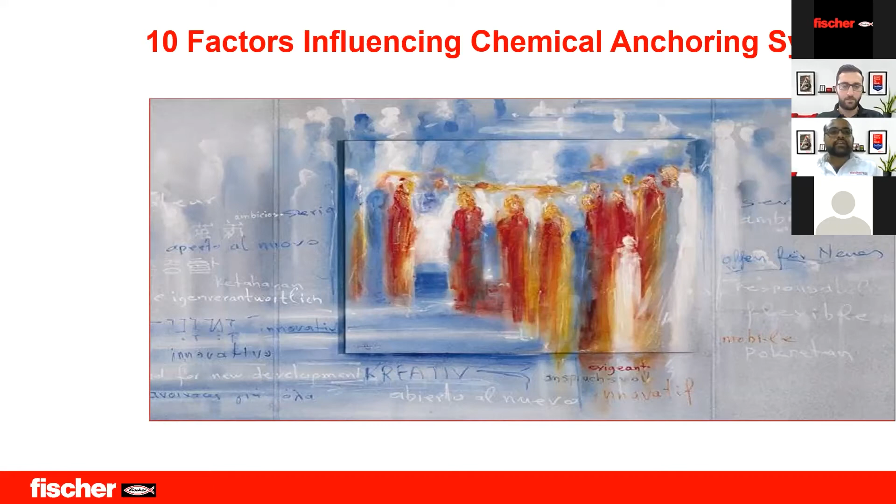The topic, as discussed, will be 10 factors influencing chemical anchoring systems. Today's speakers: myself, Mr. Dinesh Ajay Kumar, Senior Field Engineer for UAE, and my colleague, Mr. Omar Al Jazari, Senior Field Engineer for Saudi Arabia.

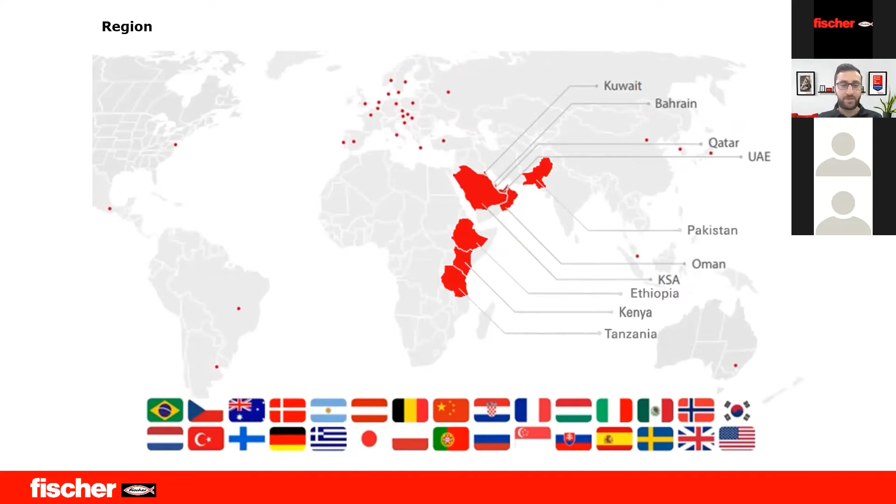Before getting into the detail, let me ask you a simple question: why do you think that the chemical anchor has such importance and influence? Could I have some opinions from you guys? You can put your replies in the chat box.

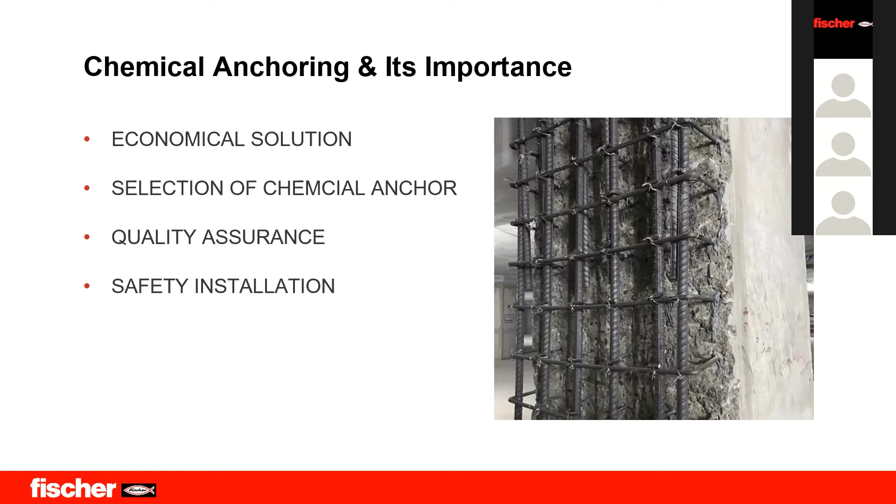As said, it's very simple: we always require an economical solution, so first of all, it's like an economical solution. At the same time, the selection of a chemical anchor should be appropriate, because there are different base materials available right now in the market, so the chemical anchor should suit the right base material. Then quality assurance, which is the most important thing in the Middle East market, because the quality should be assured that it has the capacity to take the load, or it can be used on the surfaces we are providing. At the same time, safe installation. All these points will be taken care of once we cover the 10 factors of influence. And last but not least, the valid approvals.

Here I start with my topic where we will be discussing 10 factors, first 5 by myself and the rest 5 by my colleague, Mr. Omar: different system, bond strength, curing and gelling time, installation steps and accessories, and drill hole condition.

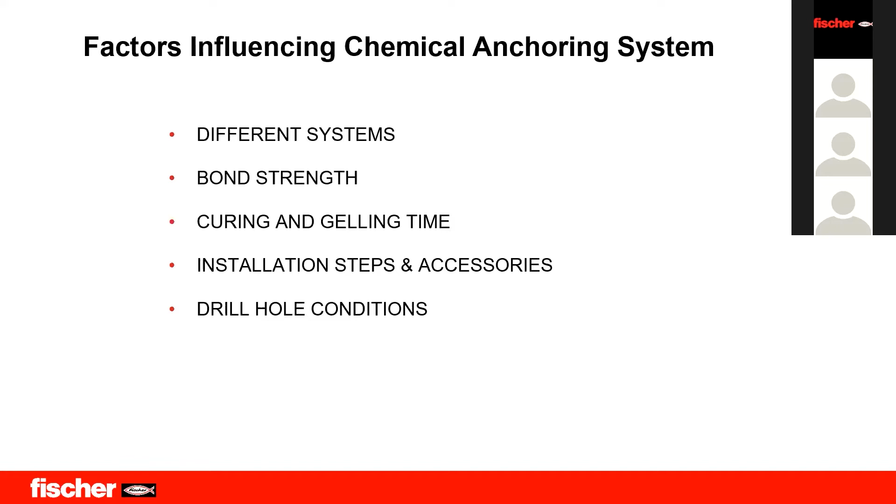So let's start with the different systems. As you are all aware, the chemical can be packed in different types. Some of the packing types are sausage or cartridge type, solid cartridge, bucket or can system, or glass capsules or foil capsules. So how does it differ? What is the point of having different types of packaging? Yes, in chemical, it plays a vital role.

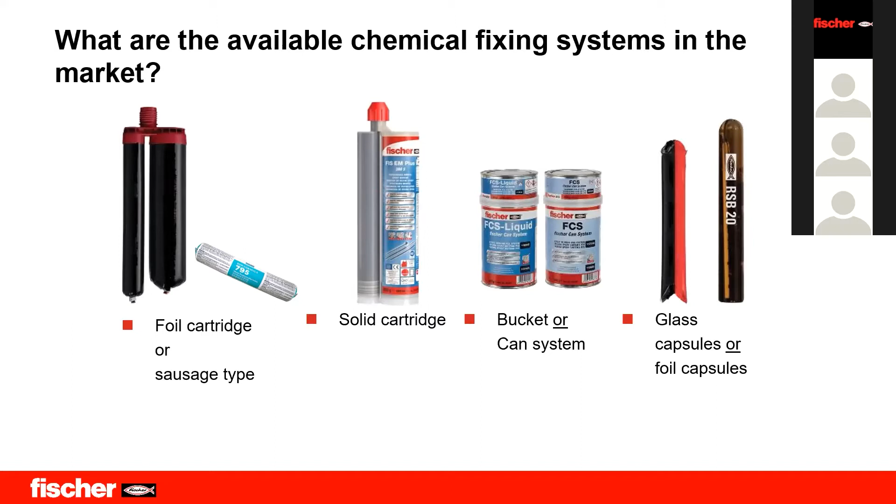Coming to the next slide, it is well explained how it can differ. First of all, the shelf life. The shelf life for a solid cartridge, which Fischer produces, is 36 months. At the same time, for the foil cartridge, it's 18 months. When you compare with foil capsules and glass capsules, it again shows a great difference. So this is where the packing has its own importance.

At the same time, if you're using a cartridge or foil, if the labours or workmanship are not used properly, there are chances it can break. But solid has got its own sustainability to stay, even though you are using or misusing it. The last but not least important point is where we can save the chemical, in the scaling. In solid cartridge, as explained for Fischer products, there is a scale on the cartridge itself so that there will be no wastage at your site.

But in foil, the scale will not be on the cartridge, but it can have one in a dispenser gun, or may not have. At the same time, in can system, no scale. And foil capsules or glass capsules also have no wastage because it comes in a cylinder shape as shown in the above picture.

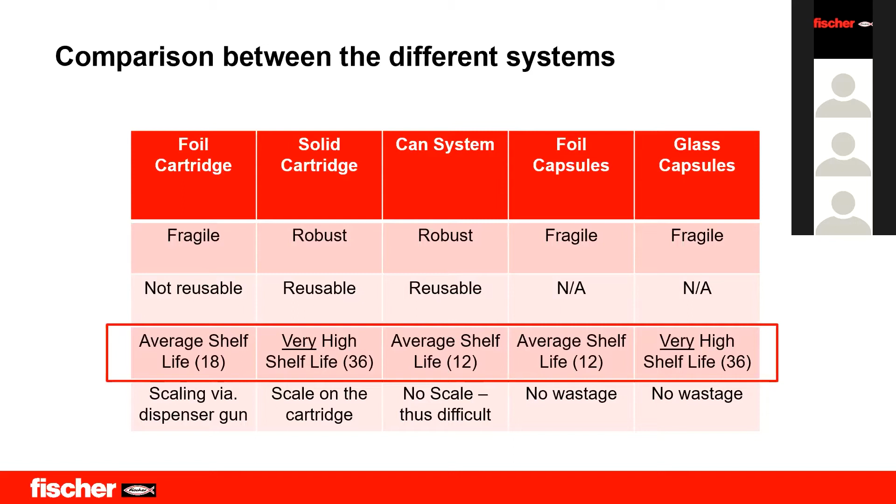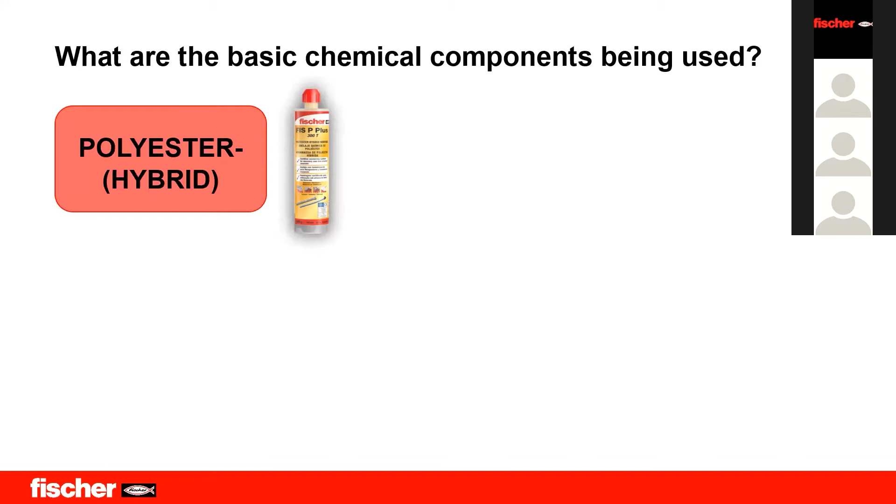Once we cover the packaging, the next important thing is the chemical compounds being used. This is very familiar because everyone knows there are different chemical compounds in the market, such as polyester, vinyl ester and silane, and epoxy. So what does polyester offer? It is one of the most economical solutions that can be used in masonry and also for non-crack concrete applications. But when you use polyester in a concrete surface for a great time, a saponification effect may happen.

At the same time, if you are using a vinyl ester, it's an economical solution for both masonry as well as for cracked or non-cracked applications, and it can be used for post-install rebar application too. The next one is vinyl ester and silane, the highest performing vinyl ester based product. But when you compare vinyl ester for masonry application, it's not that economical because there are cases where you require quite good load, and you won't find a solution with vinyl ester alone. There, we propose the masonry vinyl ester and silane type.

The best product in the Middle East market is epoxy. As everyone knows, there are few points that make epoxy a hit in this market. We will be discussing those points too, why epoxy plays a major role in the market. As you all know, epoxy is the highest performance chemical in the market, where it can be used for crack as well as non-crack applications, also for post-installed rebar applications, and also for higher depths.

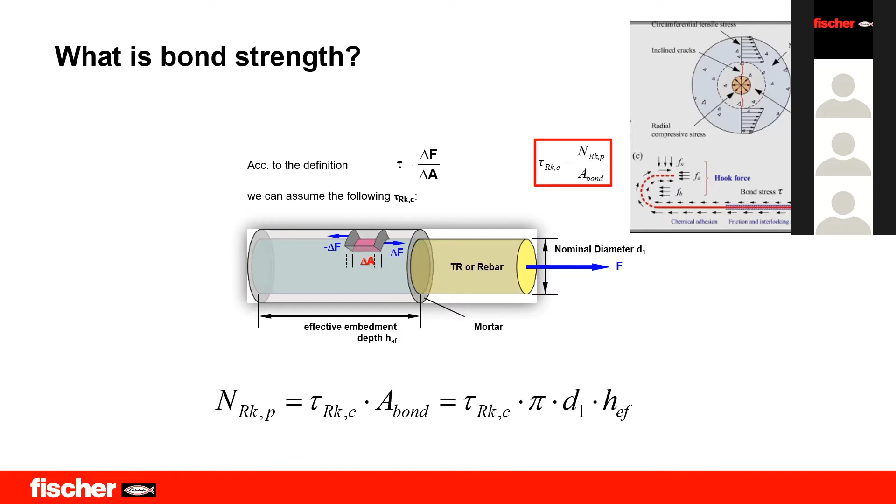Force which the chemical anchor can take per millimeter square area is known as bond strength. Here you can see the equation, the denotation of bond, which is tau RKC, and NRKP is the pullout capacity which the anchor can give, and A bond means area of bond. This is the equation for how we find the pullout capacity of the anchor: simply bond strength multiplied by area of bond.

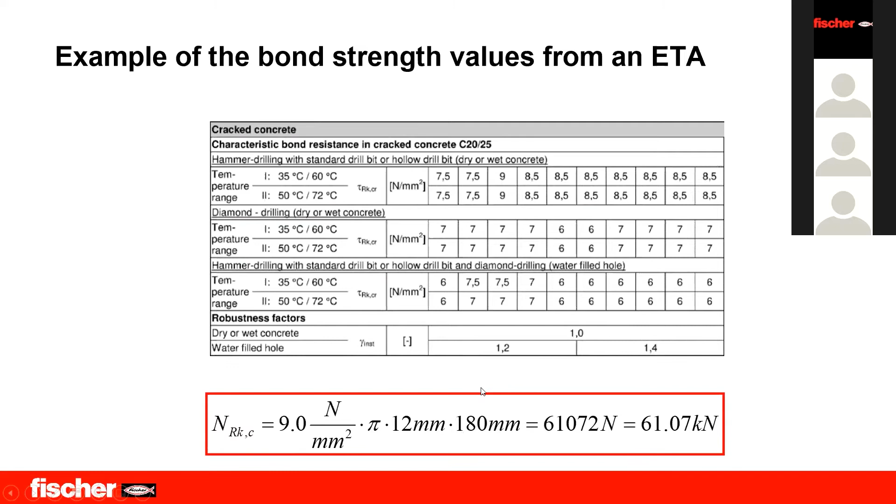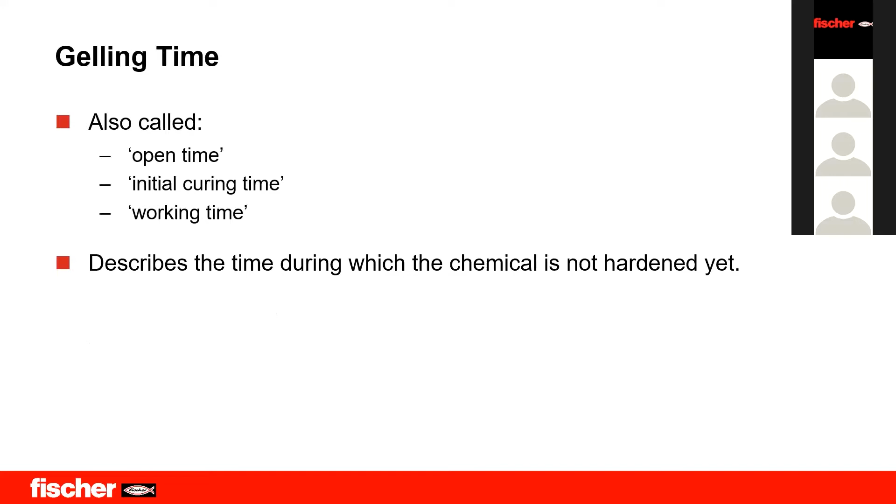Now the next is the most common term wherever you heard, because once you have a chemical in your site, there will be two terms mainly known as curing and gelling time. Gelling time, in one word, is an open time, initial curing time, or working time. Once you have made a hole in the substrate, opened your product, and fixed your static mixer, once the hardener and resin come through the static mixer, the gelling time starts. The gelling time can be different for different chemicals. It depends upon the components, like polyester, vinyl ester, silane, or epoxy. So the gelling time differs for each product.

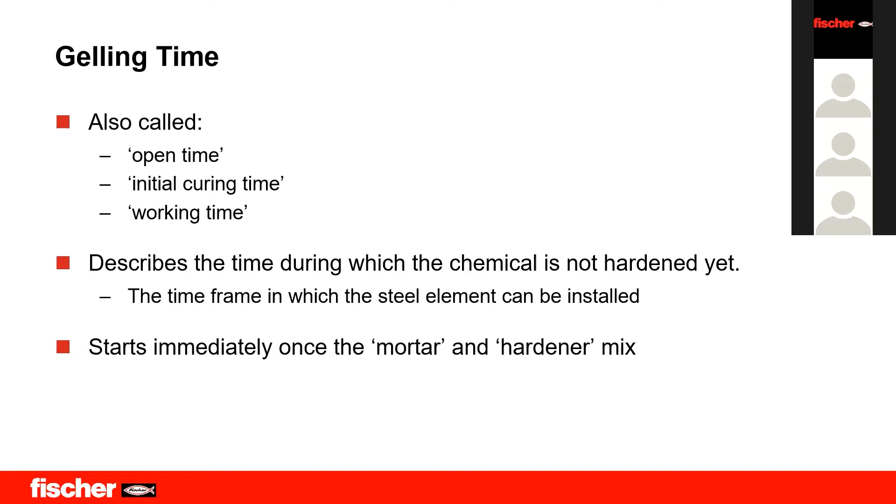As said, once the mortar and hardener mix, the gelling time starts. Now moving to the curing time. Once you have fixed your rod, gelling time means you have time to adjust the rod. In curing time, once the gelling process and all installation is done, it requires time to get cured. That chemical needs to get a perfect bonding between the substrate and the chemical rod you are using. Once the curing time is done, you have time to give the required load to that anchor.

Now, here is a very interesting question for you guys. Let's say your installation by the installer was done properly, meaning you have taken care of gelling time, but your project is in a bit of hurry, and you have done the curing time, but not up to 100% — only about 80%. What will be the load, or how much load can you consider from that?

Can I have some answers in my chat box? I hope the question is clear: once the installation is done, there is a curing time required, but the installer has waited only 80% of the time, not completed 100%, and then started applying load. What happens? Whether you will get full load, no load, 80% of load, or half the load — how much load can he assure in that fixing?

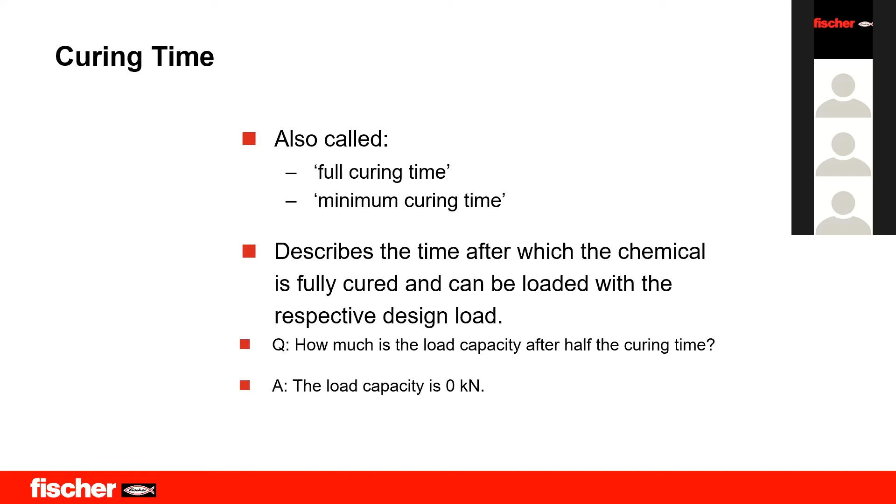Let's see what happens in that case. Actually, the load capacity is 0 kilonewton, because we cannot assure that even if it is 99%, if the curing is not done completely, we cannot assure the load capacity. In most sites, people say they have installed everything properly, and when we check how much time they gave for curing, they say 2 hours, where 3 hours is required, and then say the load is not what we considered. For sure, you will not get it, because you have to complete the full curing time as per what the chemical requires. So make sure the curing time is complete as required.

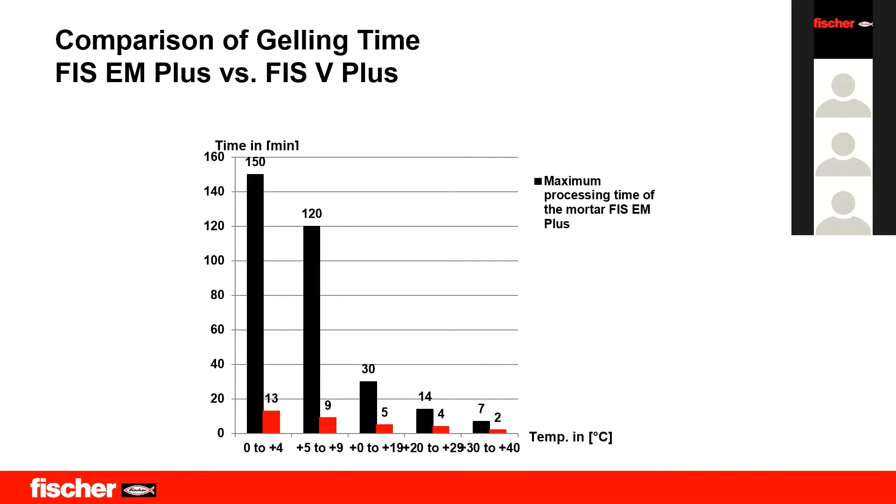Here is an interesting graph. As you see, it's epoxy mortar, FIS EM Plus for epoxy and FIS V for vinyl ester. You can see the gelling time, the time in minutes, and the temperature. Since the Middle East region has almost 30 to 40 degrees Celsius, we can see how epoxy performs here. We've got only 7 minutes of gelling time for epoxy, and only 2 minutes for vinyl ester. This means once you drill the hole and install your anchor, you have only 7 minutes for epoxy to align — before that it should be aligned. At the same time, you have only 2 minutes to align in vinyl ester, and this is why epoxy is always the most common choice in the Middle East.

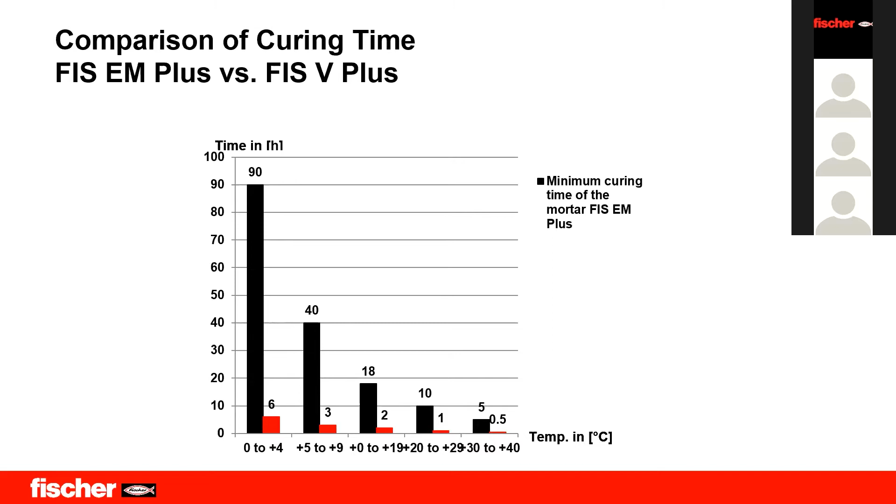Let's say for a drilling rebar application, we do require a drilling aid. It's just to avoid damaging the cover of the concrete or reinforced structures, and also to make sure that you don't damage any reinforced rebar inside the structure. So we have to use a drilling aid.

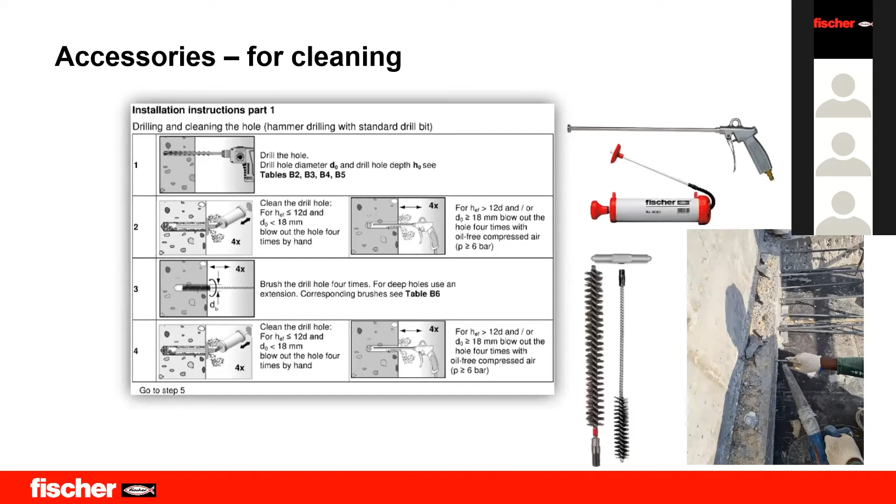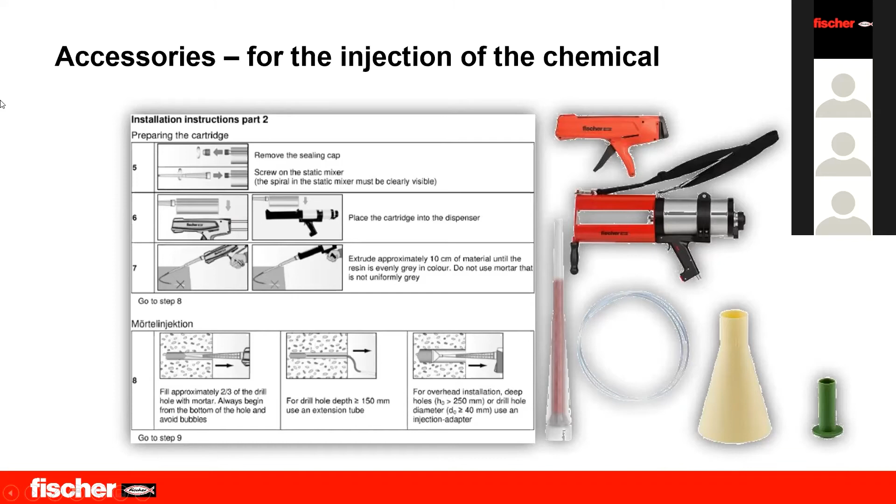At the same time, you can see an extension tube. Let's assume your hole is higher than 150mm - your static mixer will not be able to reach the end. In this case, you have an extension tube which will be connected to the static mixer, and you can easily inject your chemical inside. So for injecting, you require a static mixer, a dispenser, and so on.

Here comes a curious question, which is like overhead application. Yes, there are cases where you require chemical for overhead application also. One of the best solutions is always capsule, because you can make sure that the capsule is being inserted properly inside the hole. At the same time, there are places where you require more load or have to go more depth - in that case, you can use the chemical.

When we use a chemical, there is a question arising - what happens when you use a chemical? The chemical comes out. To avoid that, you can use wedges to make sure they are blocked here with the threaded rod and the chemical, so the chemical is not coming out, and you require to give the curing time as required for the chemical.

For capsule installation, you have its own accessories so that the capsule breaks and is fixed properly. It will be having a chisel, and it will be having a sharpened rod used so that the capsule breaks inside the hole and the rod gets installed properly.

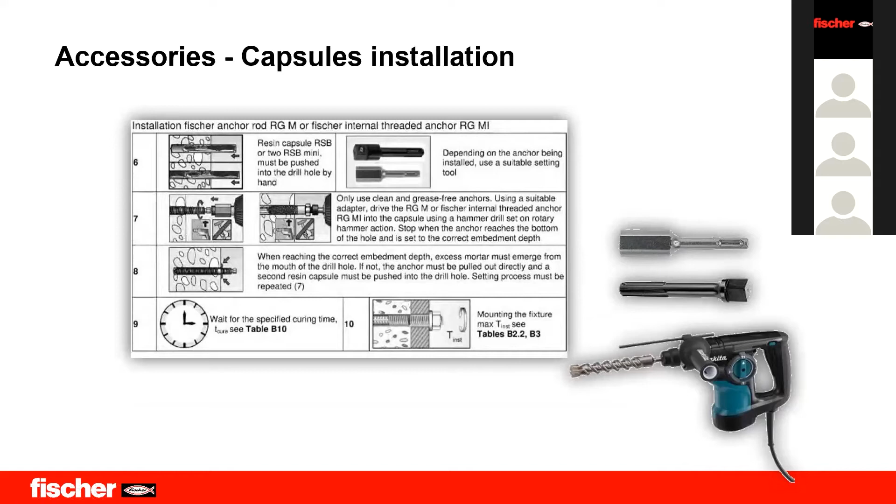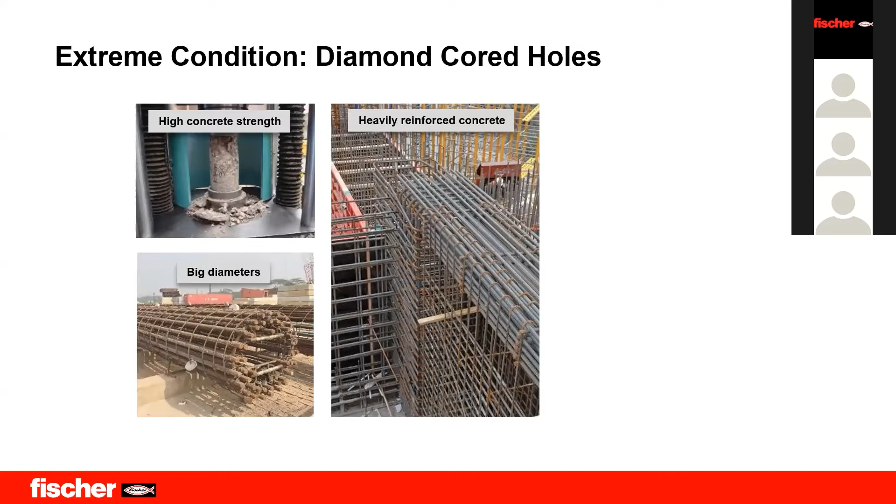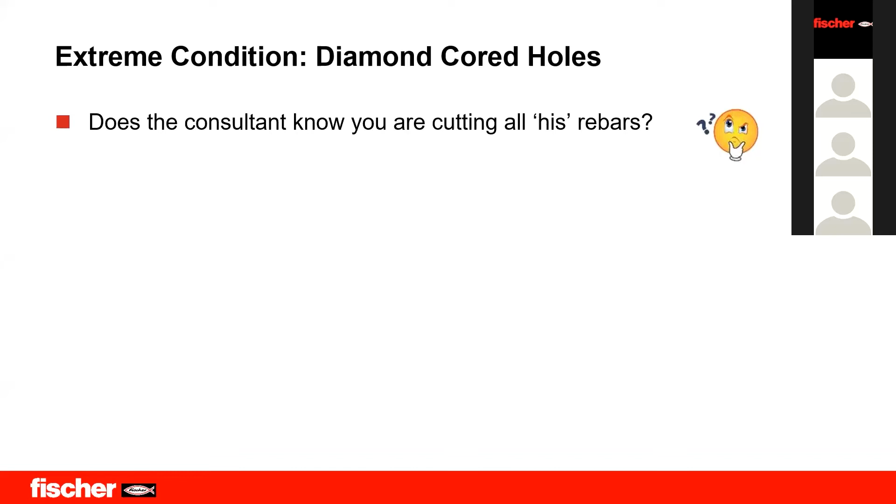So first of all, the question is that, does the consultant know you are cutting all his rebars? Yes, for sure, the consultant should be aware that you are cutting the rebar because the design of the structure and regular structure stands on the reinforcement, and he should be aware that we are doing core drilling for some other applications. Is there any difference between a hammer drill and diamond core hole?

Yes, there is a difference. We'll cover it in the coming session, showing what is the difference between a hammer drill and a diamond core hole. Do you think there should be special precautions or installation steps for diamond core holes? Yes, there are installation steps. You can find elaborated installation steps shown in the ETA, because there is a slight change in cleaning procedures, and also whether it has an influence on the load capacity.

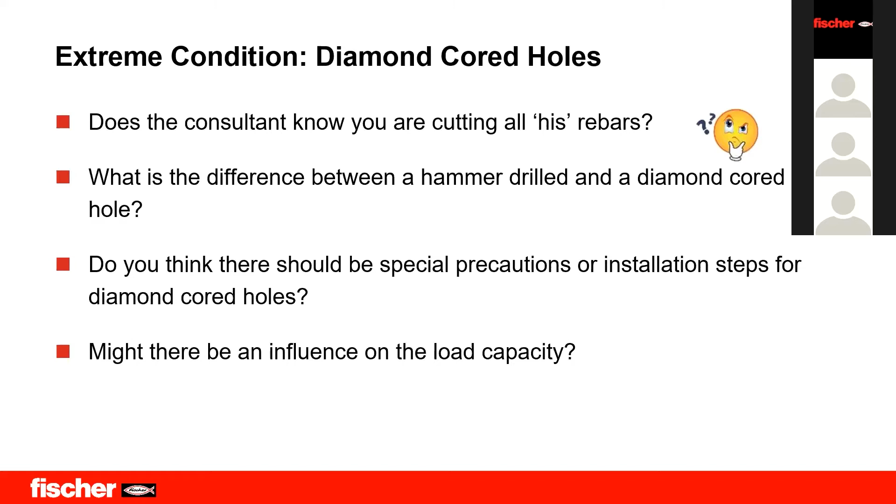But for all this condition, we do have a solution known as epoxy mortar plus, FIS EM Plus, which has got 100 years of service life. It's used in water applications, and it has all the approvals like Seismic, Fire, ICC, and others. At the same time, it has been approved for diamond core drilling as well as for hammer drilling.

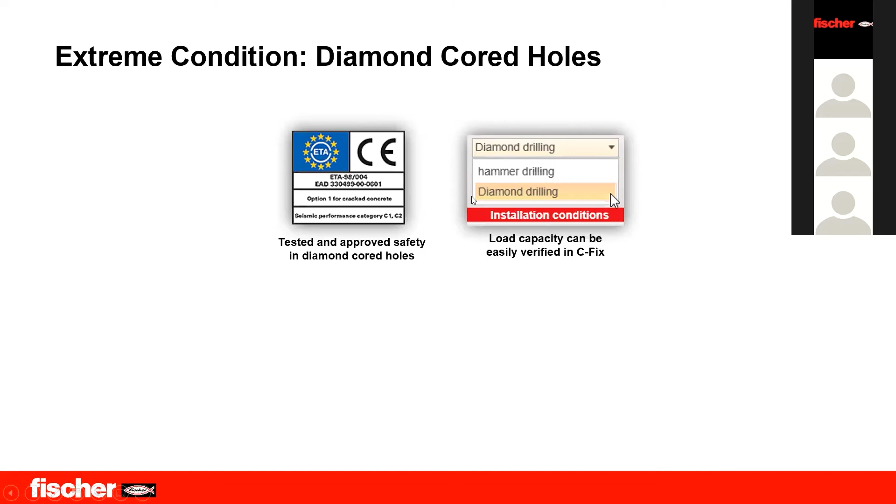As said, in a software, if you have a design to do that, someone is asking, we need a design with diamond drilling. Yes, Fischer can provide you a solution showing that load capacity in C-Fix can be changed where it's showing diamond drilling or hammer drilling. So if you have diamond drilling, you just need to change the option and designs can be done.

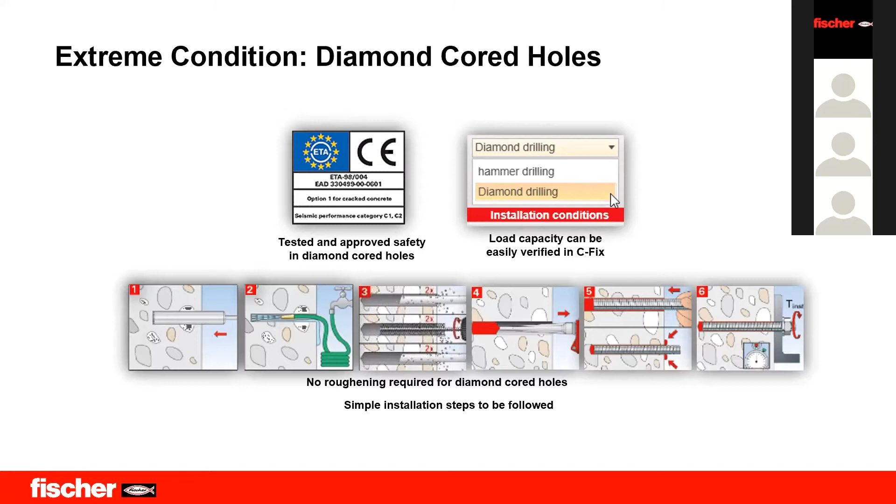Here is the procedure of diamond drill core hole. The best part of the product I explained, FIS EM Plus, is that we don't require any roughening apart from the drilling. You don't need to do any extra roughening because once you are doing diamond core drilling, it's going rotary and it will be a smooth surface. But this chemical has got approval without roughening.

Let's watch a video. This is a very interesting video, and once you watch this video, you will understand how important drill hole cleaning is.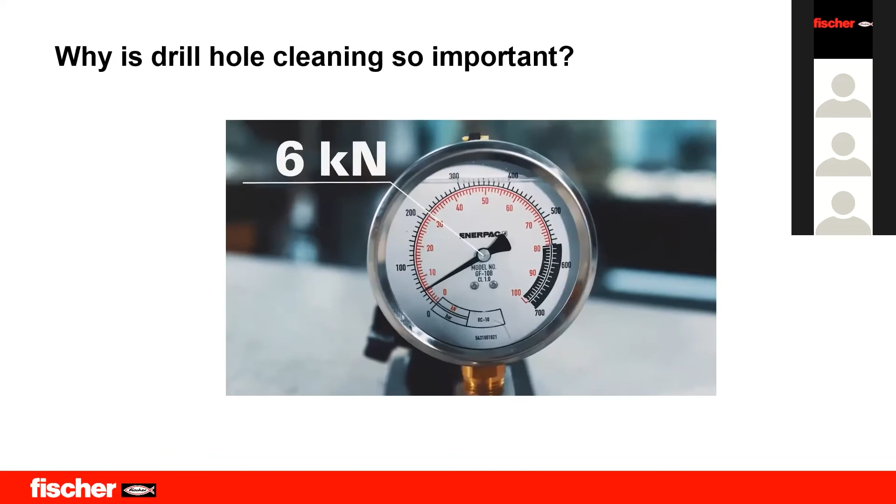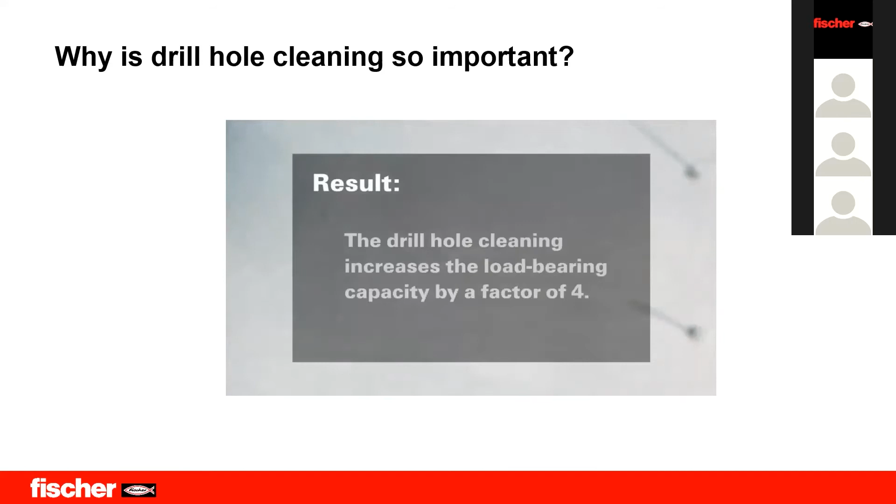So now I hope you guys understood why cleaning is so important. Where cleaning was properly done, it was about 24 kilonewton, whereas when the cleaning was not done, it's only 6 kilonewton. It has come down like 4 times. You can see the exact image also, like dust and film over here in that chemical, because the cleaning was not done properly.

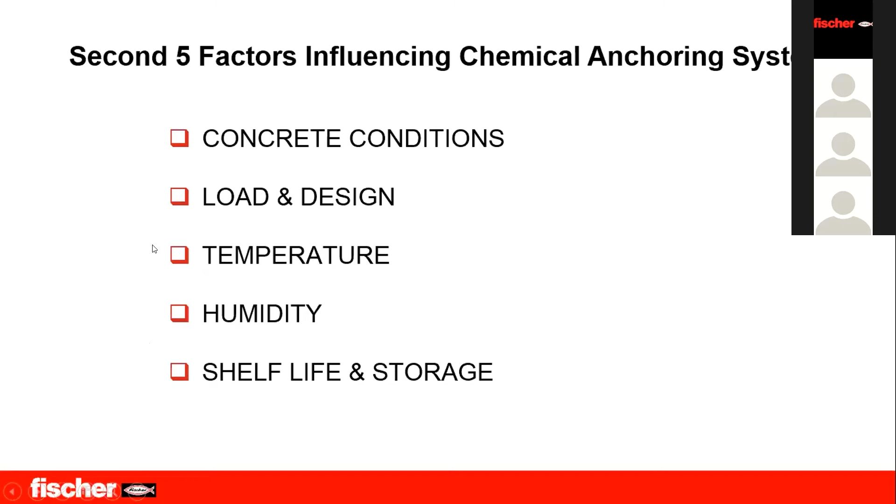Let's start with the concrete condition. As you know, concrete as a material is very weak in tension and very strong in compression. This is the reason why the structural engineer puts reinforcement in the tension zone. If you see here...

When the live load comes to the structure, this black line shows the tension zone. In this tension zone, the concrete will crack. There will be some crack with some width that appears in this concrete. Now, when you want to install the anchor at this zone, which is the tension zone, which is cracked concrete, you should be ensured that the anchor you use is approved for cracked concrete.

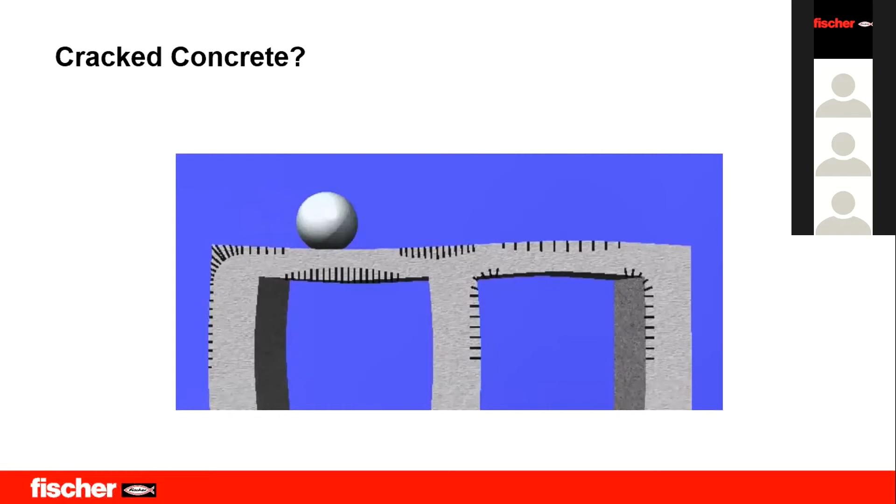On the other side, showing the non-cracked concrete, which is the compression zone. So this is the difference between cracked and non-cracked. The European Technical Authority recommends that if you don't know whether the concrete is cracked or non-cracked, if you want to fix your anchor in a tension zone or compression zone and don't know which, you should assume that you will fix in the cracked concrete, which is the critical case.

And the tension in the tension zone, as you see, when the load is moving, it will be different. It will change the location of this tension zone during the changing of the load itself.

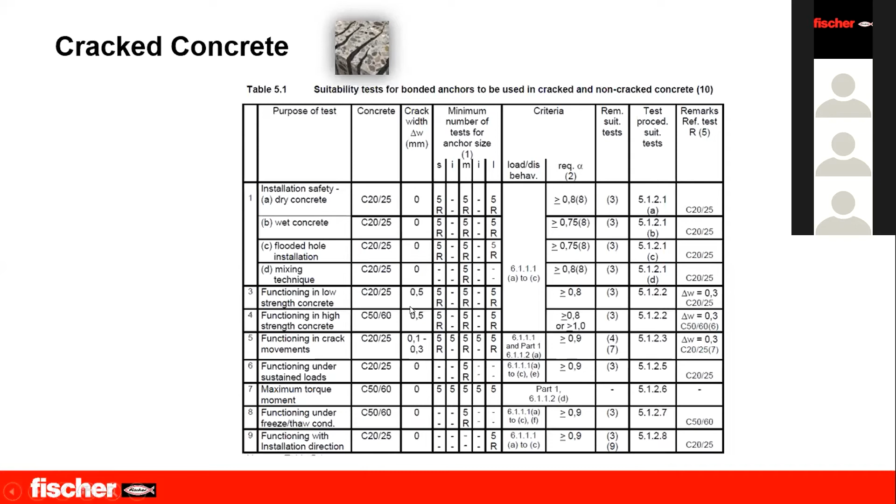Now, the European Technical Authority recommends there is a procedure test you should follow. The supplier of the anchor, any anchor supplier, should confirm that this anchor is approved for cracked concrete, especially for chemical anchors, like the crack width. They mention what is the crack width, so that the maximum crack width that you test your anchor under is known.

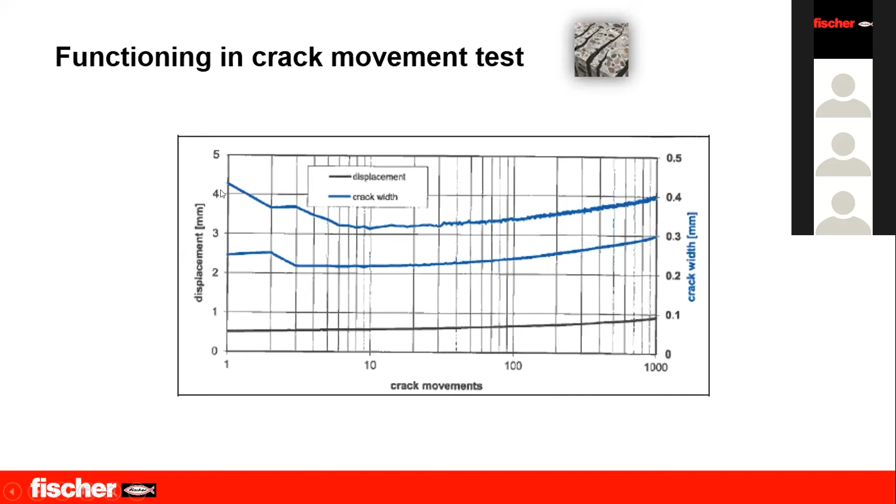And this crack width, they use it to measure the movement - what is the displacement of this anchor during the crack? For example, if the crack width is 0.3 millimeter, the displacement of the anchor when you apply the tension load reaches around 2.5 millimeter. This 2.5 millimeter is accepted based on being less than the limit value mentioned in the European Technical Authority or European Technical Assessment. For example, if you test your anchor under a crack width of 0.4 millimeter, the displacement should be 4.2 millimeter and should not exceed this to be approved for cracked concrete.

Now, the second thing we should focus on in the concrete is the seismic. We can divide the seismic category into two categories, C1 and C2. C2 is more dangerous than C1.

The main difference between category 1 and category 2 is the crack width. In category 1, the anchor is tested under a crack width of 0.5 millimeter, while in seismic performance category 2, the anchor is tested under a crack width of around 0.8 millimeter.

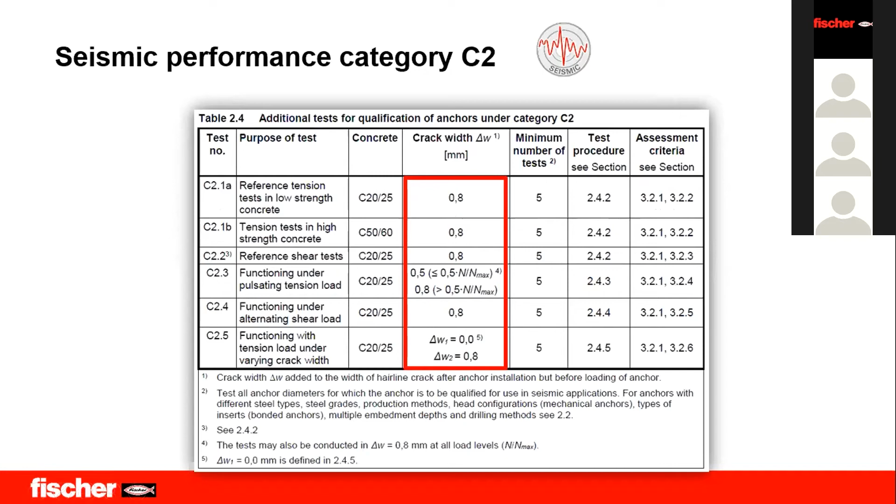So the ETA, European Technical Assessment, will test this anchor and give approval for it, and it should be tested based on the recommendations mentioned in the European Technical Authority.

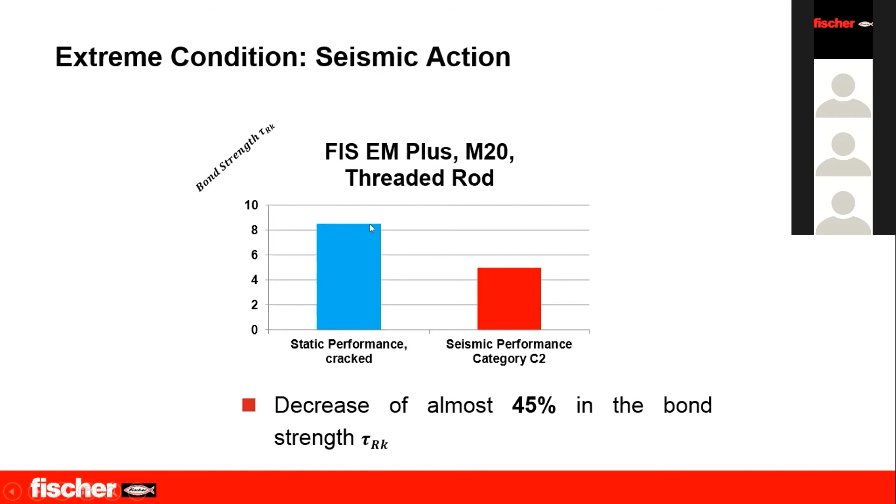Moving on to the second important point: load and design. What is the action load on the anchor? How can we ensure that this anchor can hold the load acting on it?

Before I start, I have one question. If you can write it in the chat box please: what do you expect the failure mode of tension to be when we have the anchor inserted in the concrete and we apply tension? What is the failure mode that happens? Where will the failure appear? Is it in the concrete, or in the anchor, or in the chemical itself? What do you expect? Can anyone help me, please?

In concrete, usually the chemical. Actually, the failure mode in concrete can be combined. It can be in the concrete itself, or the chemical, or combined concrete and chemical.

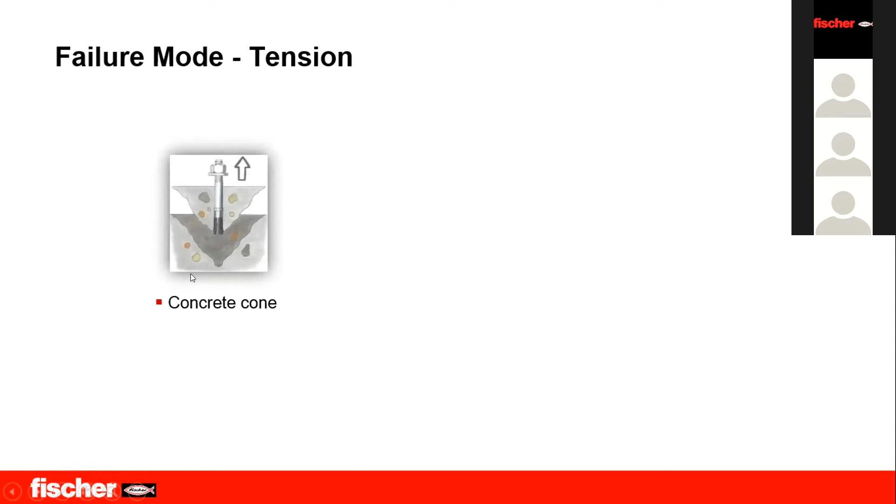One of the most common failure modes is the concrete cone failure. When the concrete has a tension load, the concrete itself will fail in a cone shape. It will be extracted from the base material as a cone shape. So this is the first mode.

The second mode is the splitting failure. This happens when the concrete thickness is small or the anchorage depth is very high, very long. So this is the second type of failure coming from the tension load.

The third one is the failure on the anchor itself, on the steel itself - the threaded rod. The tension load exceeds the capacity of the steel itself. So this is the third failure mode.

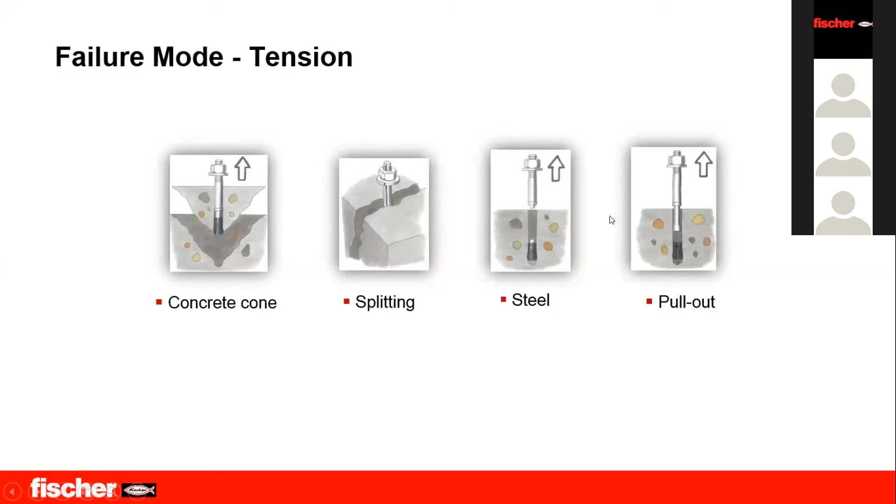The last one is the pull-out failure. The anchor doesn't have proper adhesive bonding between the anchor and the chemical itself. This is what, as the Danish said, is the fifth factor, which is the cleaning. The cleaning should be done properly to ensure high quality adhesive bonding between the anchor and the chemical, and between the chemical and the concrete itself.

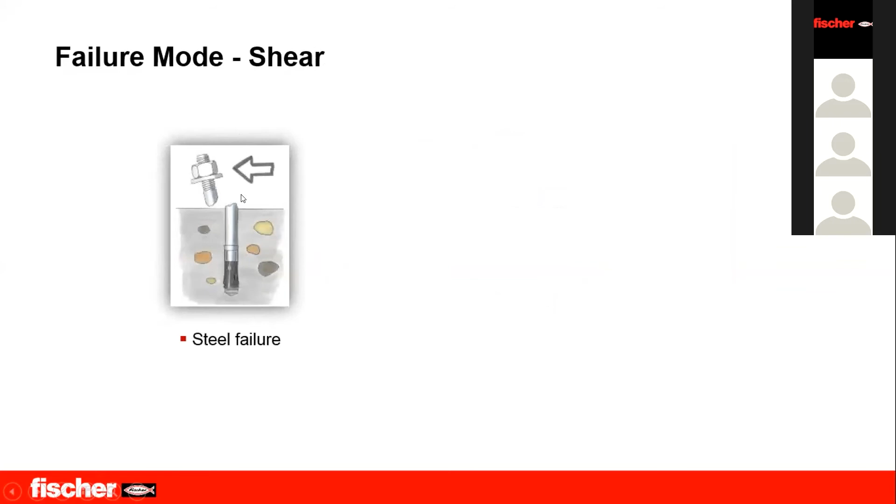Now let's go to the failure mode in shear. We have steel failure, and the second one is concrete breakout failure, or concrete edge failure. This is important to focus on, especially when fixing applications like curtain walls, where the anchor is very near the edge of the concrete - you should consider this edge distance.

Now, load and design. One thing I want to add in general is that the engineer should understand the calculation output from our software. There is a Fischer software called FixPerience, which is famous, and you can download it from the Fischer website. With this software, you can make calculations and check the anchor itself.

Now, they should check the resulting anchor forces and not the design action when a pull-out test is conducted. We will see this in the next slide.

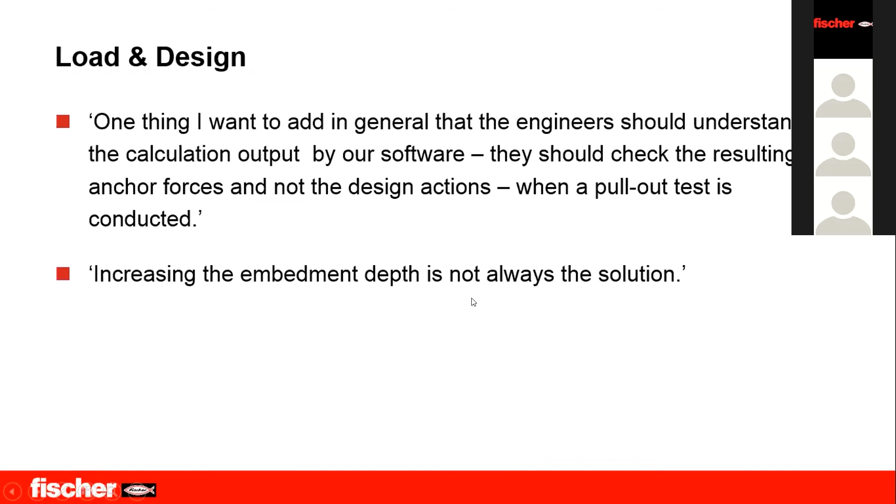The second important point I want to focus on is that increasing the embedment depth is not always the solution. The anchor may still fail if you increase the embedment depth because of some other factor. Also, increasing the diameter of the anchor is not always the solution, because it is affected by other factors like concrete cone failure.

So it is not always the solution to choose the bigger size or the longest embedment depth.

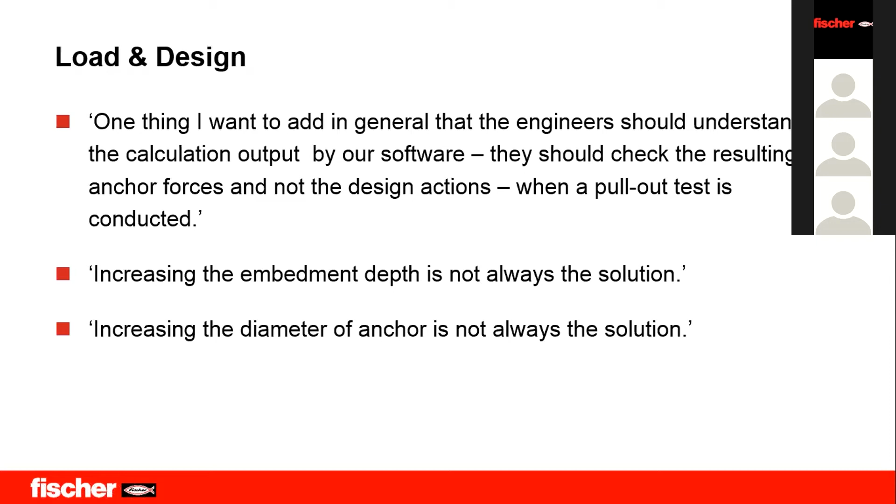the consultant needs to check if this anchor can hold the load or not. We will make a pull-out test on the site. When we make the pull-out test, this value we should compare it with which value exactly, to 1.5 or which value?

Actually, the software makes finite element design and finite element analysis, and they distribute these forces to each anchor. These forces called 1.5, 2.5, 2.5. This force is called design action. From this design action, the software will convert it to the resultant anchor forces.

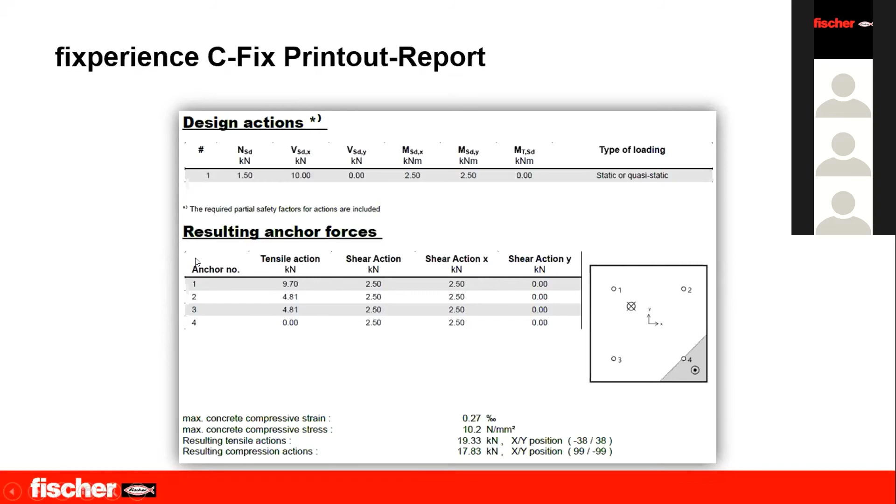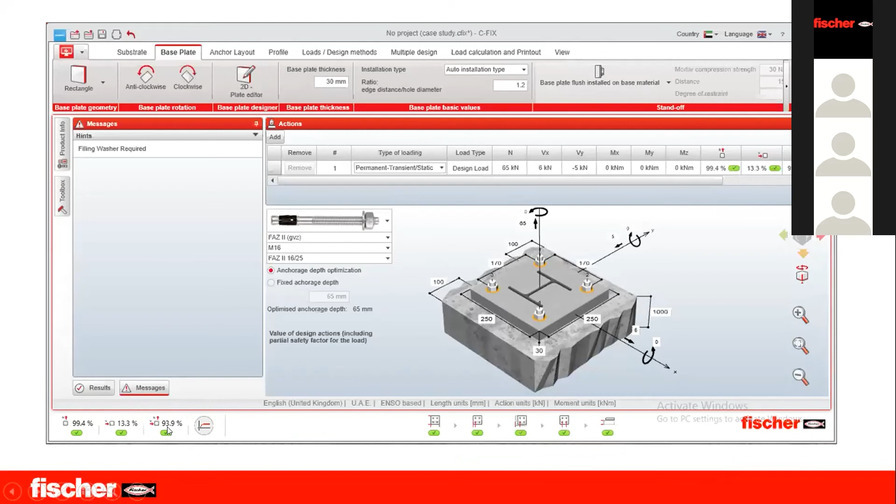If we increase the size, it will fail. If we increase the size to 24, it will fail, because the concrete cone shape will be overlapping with each anchor. So the capacity will become lower for the concrete cone especially, and the case will fail. So this is one example showing that increasing the diameter is not always the solution.

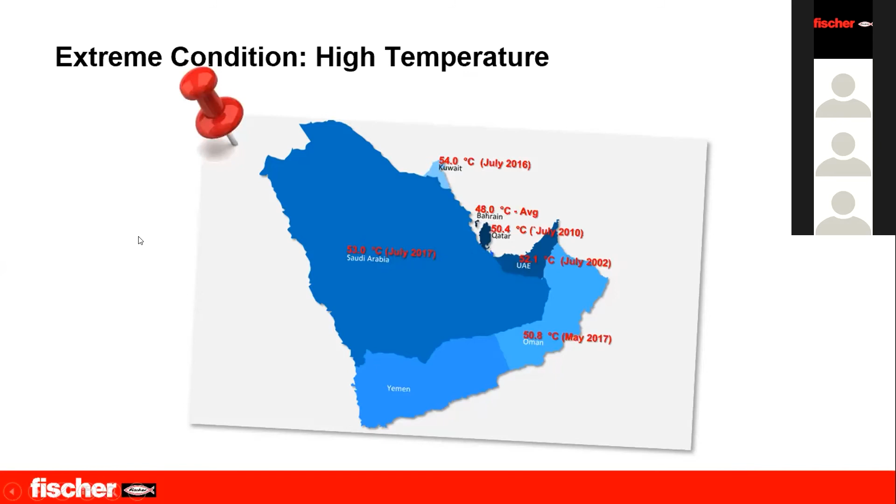Now moving to the third important factor, which is the temperature. What about the temperature, in the high temperature, especially in the Middle East? We are facing many high temperatures, like the temperature reaching around 54 Celsius and more. So will this high temperature affect anything?

Have you ever faced any challenges with chemical anchoring due to the heat? Sure, there are many challenges. The most important two: the curing is very fast, and the chemical should be stored in a cool place. There is a specific temperature limit for storing the chemical.

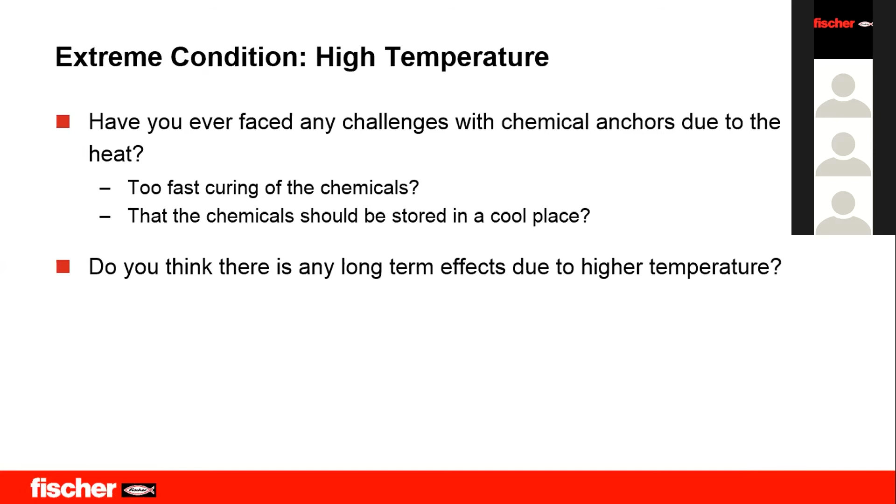Now, what about the long-term effects due to the high temperature? What is the effect of this temperature after a long time? It will affect the bond strength itself, and this shows the quality of the chemical, whether this chemical from Fischer or from another brand can hold or save the same capacity during the high temperature.

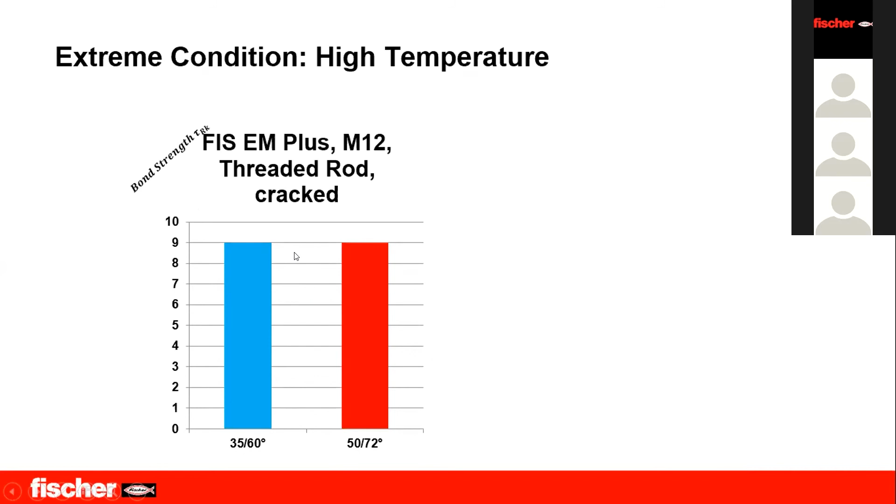Another example for threaded rod M12 in cracked concrete: for 35 Celsius long-time temperature, the bond strength is 9 megapascal. For 50 Celsius, it is around 9 megapascal also, and this is very rare, you cannot find it with every supplier. Other competitors have a decrease in high temperature between 8 megapascal to 6 megapascal. So this is the effect of high temperature.

Now, what about in case of fire? What will happen in the fire case? If there is a decreased performance due to higher temperature, what will happen in case of fire? Sure, there is a decrease in performance in fire. There is something called fire resistance that should be tested for this chemical.

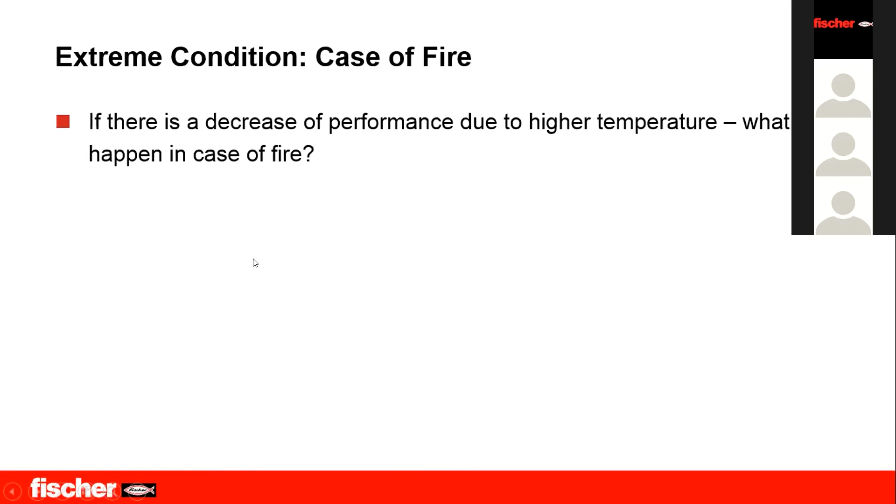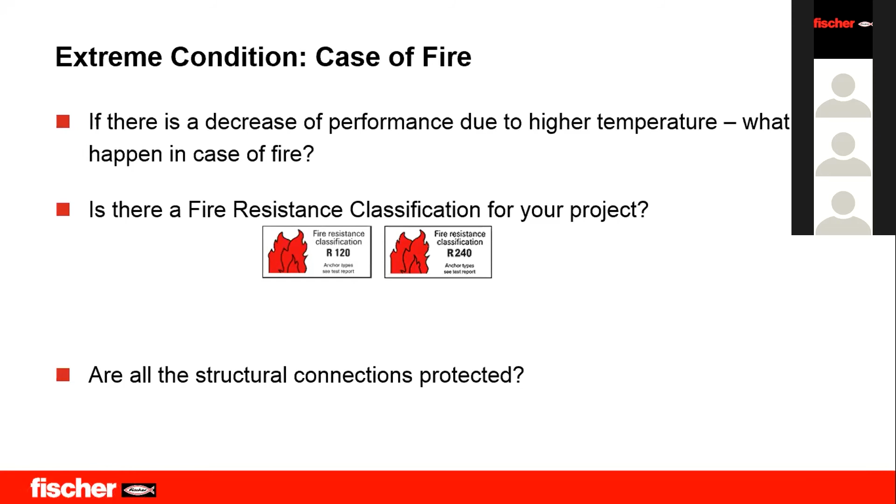Our chemical has R120 and R240 ratings based on the chemical selection. The other thing you should consider, not the chemical itself, is the threaded rod and the steel connection, whether it is protected or not, and this is important. Maybe the failure will happen to the steel plate or the steel structure or steel connection, not to the chemical.

Moving on to the fourth factor, which is important: the humidity. What is the drilling hole condition? We have three hole conditions: dry, wet, and flooded drill hole for underwater application.

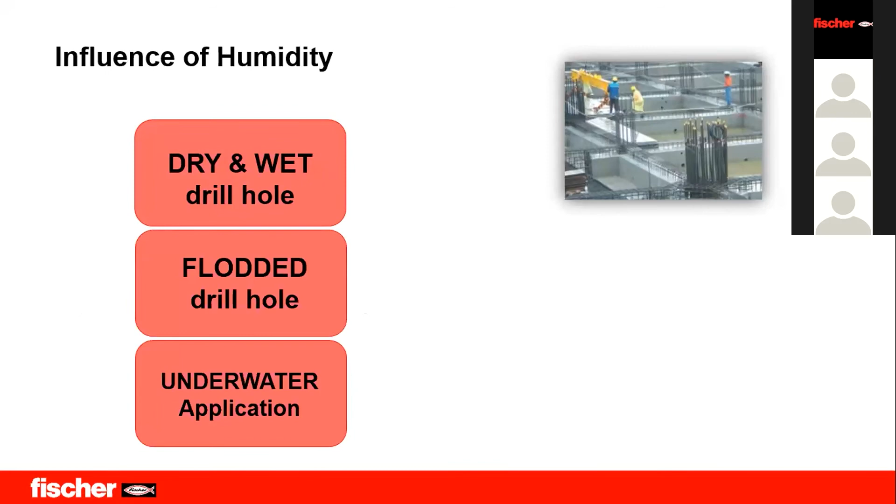These three stages of humidity will affect the curing time. If you have a curing time in dry concrete of, for example, 5 hours, you should double it in wet concrete. In wet or water-filled hole, the curing time must be doubled.

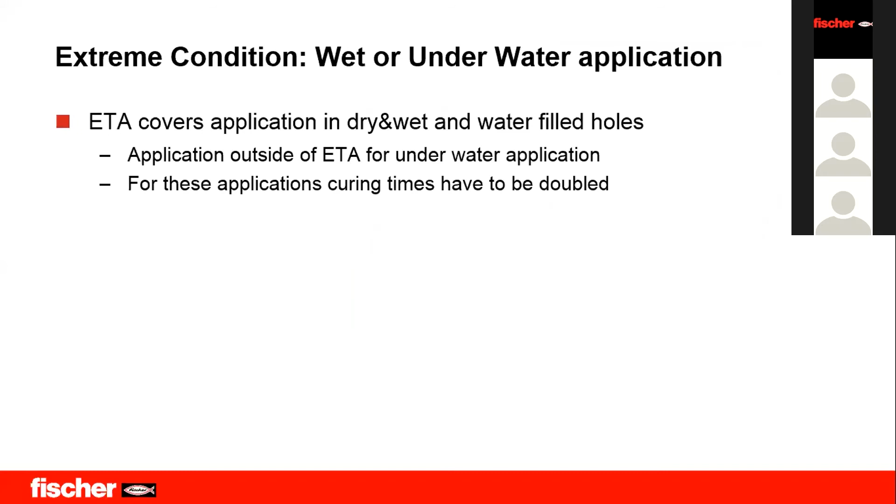Installation in a water-filled hole might be possible, however the bond strength might be less than in a dry or wet hole. Wet or underwater application is covered by ETA in dry, wet, and water-filled holes, but application outside of ETA for underwater use requires the curing time to be doubled.

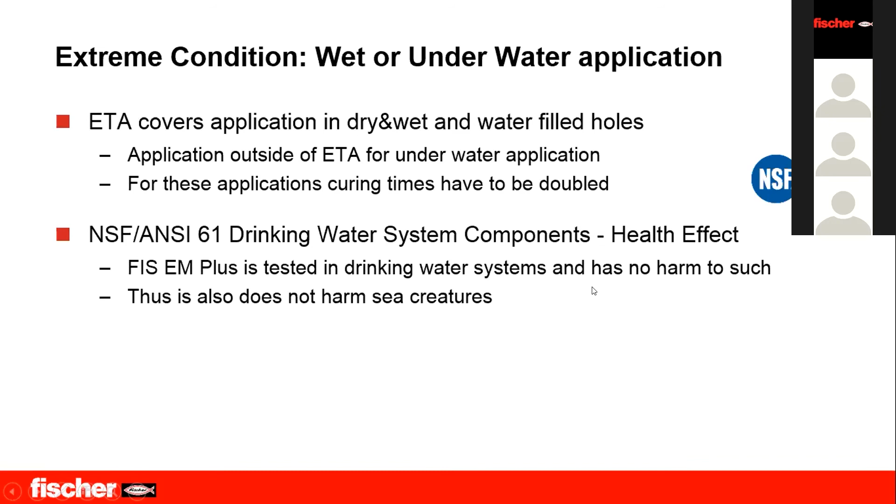Also, our chemical FIS EM Plus is tested for NSF. FIS EM Plus is tested in drinking water systems and has no harm to such systems, and thus does not harm sea creatures either.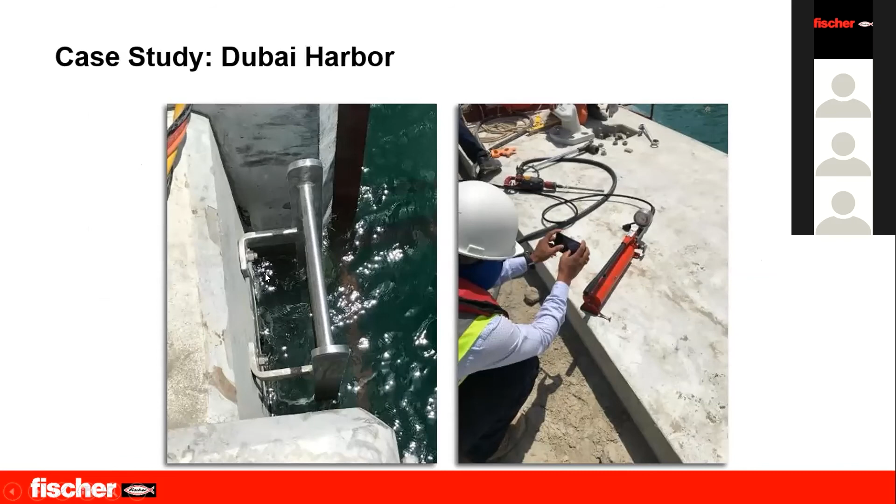We have a case study here for the Dubai Harbor project. This ladder will be fixed under the water using the chemical FIS EM Plus. A scuba diver sank in the sea and installed the anchor underwater. We tested this anchor, and it reached around double the required design load.

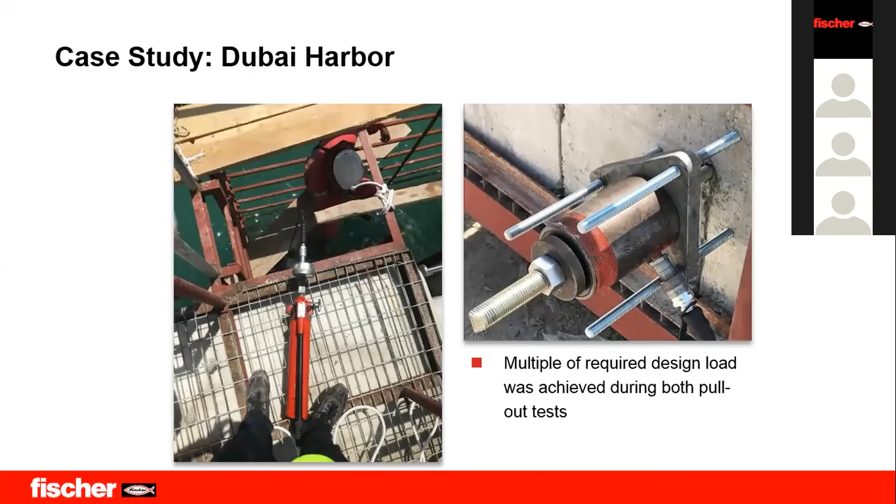Moving to the last factor, the shelf life and storage. What is the shelf life? What is the longest shelf life that the chemical can be stored for? There are some important points we should mention about it.

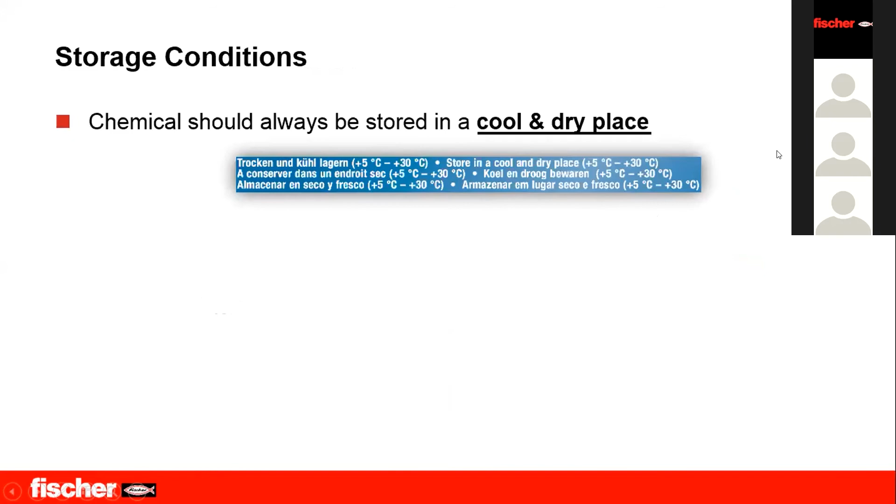The chemical should always be stored in a cool and dry place, between 5 Celsius and 30 Celsius. Within our shelf life, we also consider that the cooling chain might be interrupted for a maximum of 2 weeks total.

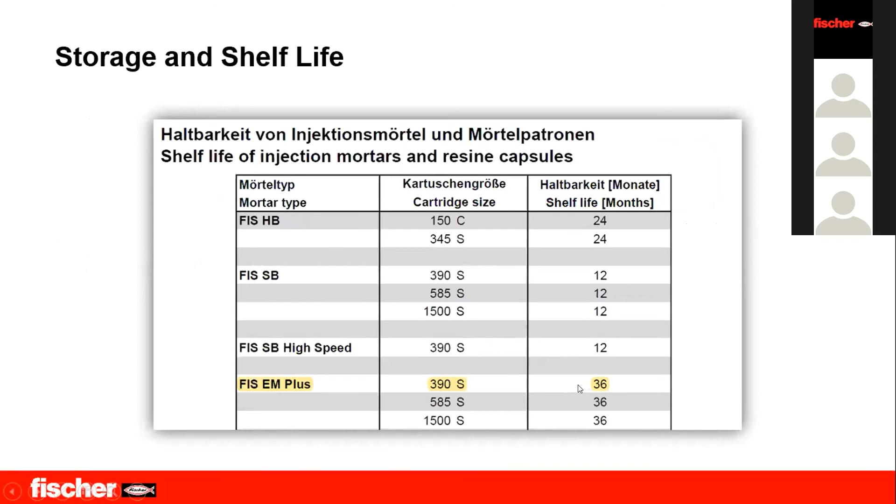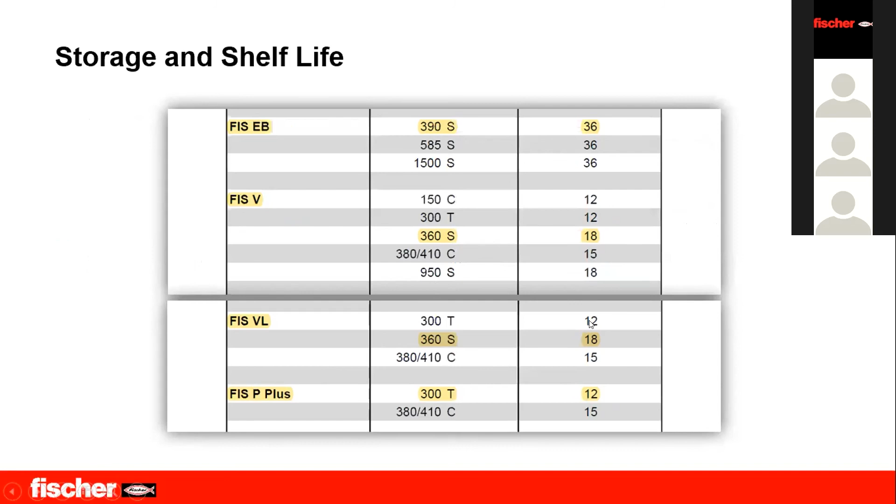Now, this is the storage and shelf life for each chemical. FIS EM Plus has the longest shelf life, around 36 months, 3 years. FIS EB is 36 months. FIS V is 18 months. FIS VL is the same, 18 months. FIS P Plus polyester is 12 months. And for our capsules, the longest shelf life is around 36 months, which is 3 years.

Expired chemical should not be used. Fischer cannot make any statement regarding the performance of the chemical after the expiration date.

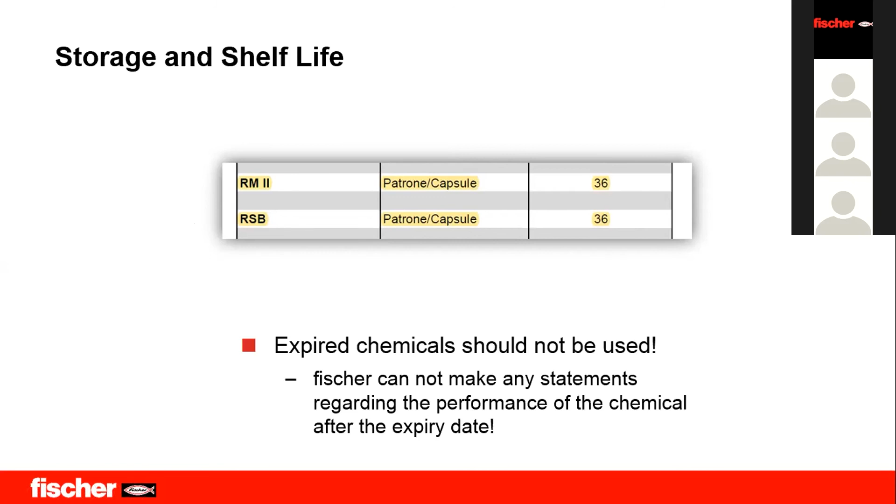Now this is the summary of our most important, our top chemicals. We can divide them into fast curing and low curing. In fast curing, we have polyester products. In low curing, we have the epoxy.

For fast curing, if you have the base material masonry and want the most economic solution, it will be FIS P Plus, but you should check the load itself. It has many advantages: ETA approved, best performance in masonry, no special equipment is needed, and procurement cost can be reduced based on the polyester resin. Shelf life is around 15 months.

If you want to reach a higher load level than FIS P Plus, you can go to FIS VL. You can also fix this one in concrete and masonry. FIS VL is approved for ETA, rebar, and masonry, and allows anchoring in water-filled drill holes. It has a 50-year service life expectancy, an economic price, and the shelf life is around 18 months.

And if you want to reach an even higher load than FIS VL, you can choose FIS V Plus. You can fix it in concrete and masonry. It has seismic approval, and also has a 100-year service life expectancy.

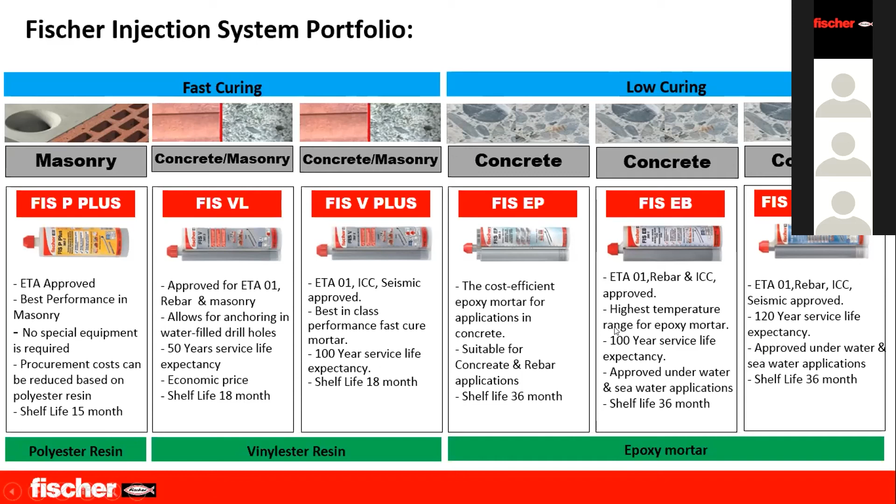So this is the end of the presentation. Hope it's very clear for you. Thank you very much for your attention.